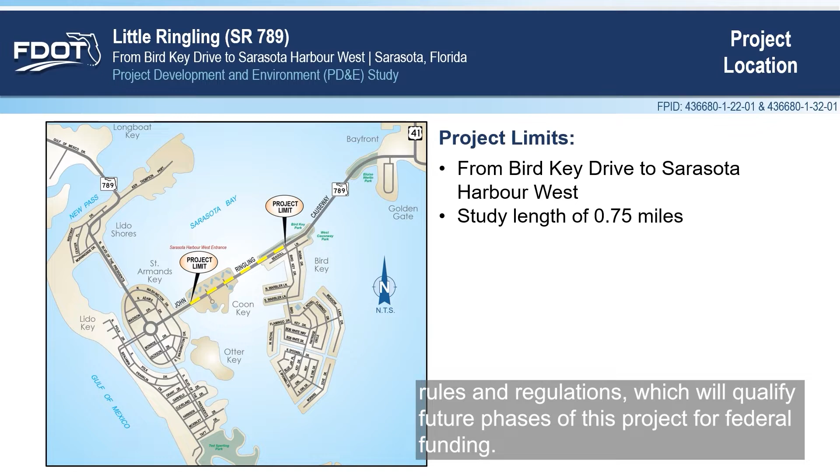This PD&E study will be conducted and completed according to the requirements of the National Environmental Policy Act and other related federal and state laws, rules, and regulations, which will qualify future phases of this project for federal funding. Please see the workshop display boards for more specific information.

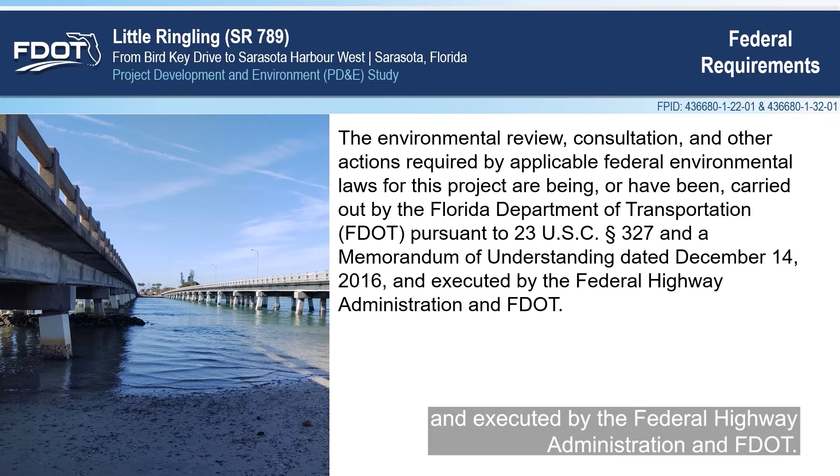The environmental review, consultation, and other actions required by applicable federal environmental laws for this project are being or have been carried out by the Florida Department of Transportation pursuant to 23 United States Code Section 327 and a Memorandum of Understanding dated December 14, 2016, and executed by the Federal Highway Administration and FDOT.

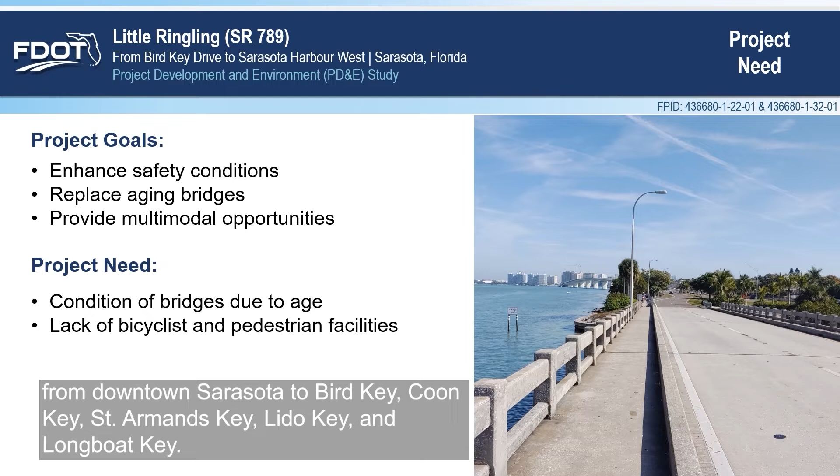John Ringling Boulevard, State Road 789, serves as the primary connection from downtown Sarasota to Bird Key, Coon Key, St. Armands Key, Lido Key, and Longboat Key. The Little Ringling bridges cross the Coon Key Waterway, a navigable waterway.

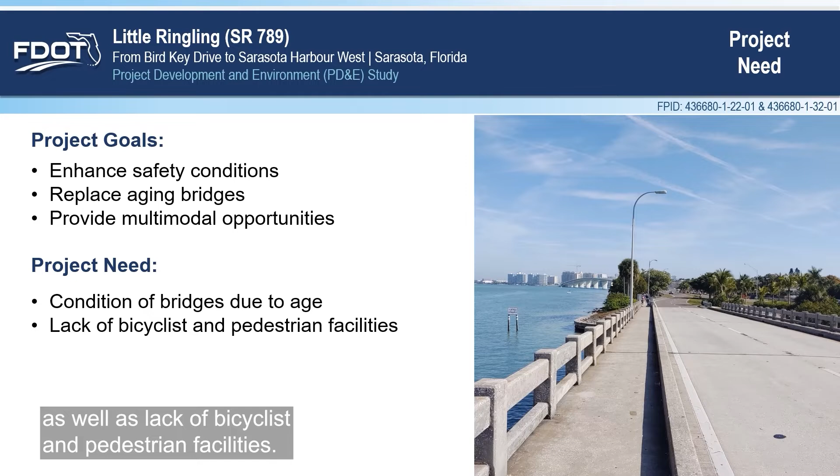The project alternatives being considered will address structural and geometric deficiencies, enhance safety conditions in the area by providing multimodal transit opportunities, improve emergency evacuation and response times, and increase the bridge's resistance to storm events. The need for project alternatives on the Little Ringling bridges is indicated by the conditions of the bridges due to their advanced age, as well as lack of bicyclist and pedestrian facilities.

Within the project limits, the existing John Ringling Boulevard is classified as an urban minor arterial and consists of a 4-lane divided facility between Bird Key Drive and Sarasota Harbour West. The travel lanes are 11 to 12 feet wide, with 5-foot sidewalks or 10-foot multi-use paths on either side of the facility. Currently, there are no designated bicycle facilities within the project limits.

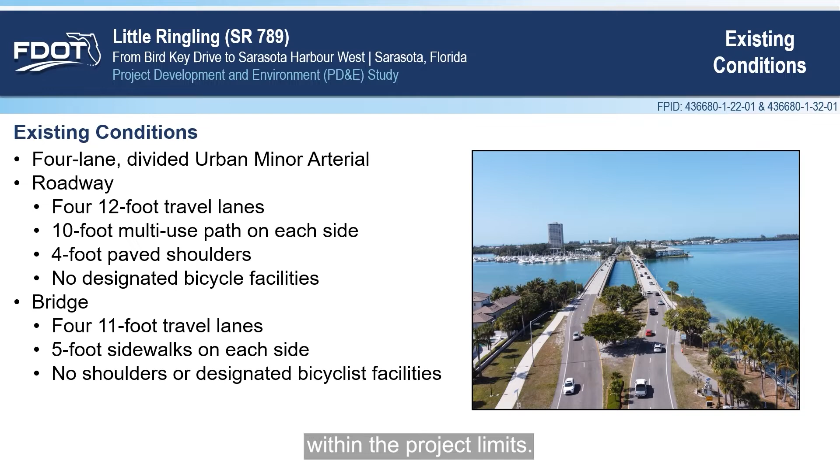The existing twin bridges were constructed in 1958. They are spaced 100 feet apart, center to center, and each bridge is 1,008 feet long and 37.5 feet wide out to out. There are 21 spans at 48 feet each, consisting of 4 lines of precast concrete beams supported on concrete piles. The maximum vertical clearance under the bridges is approximately 12 feet above average high water.

Several sections of the bridge deck were replaced on the westbound bridge in 2016, along with other repair work throughout the years.

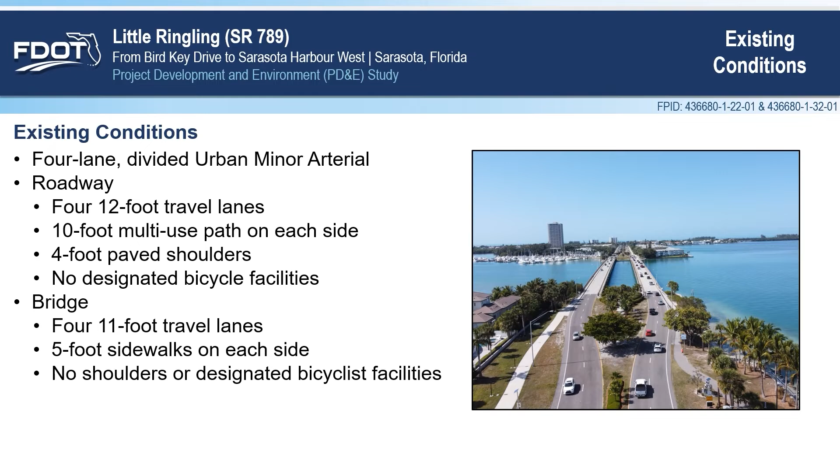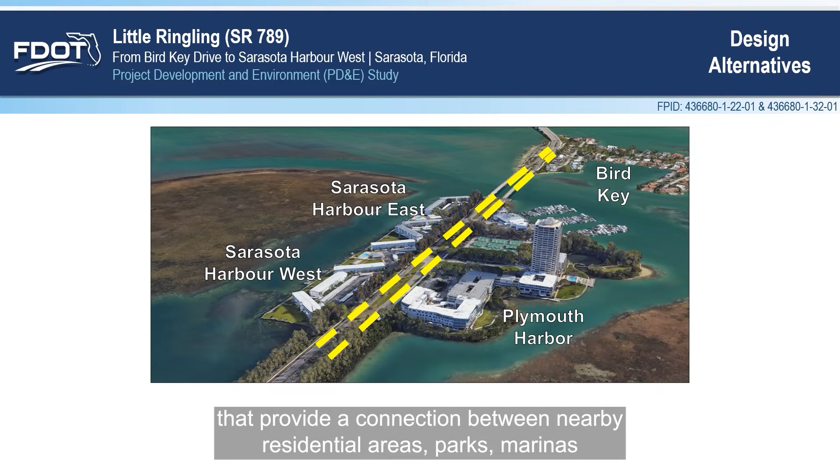The Little Ringling improvements being considered evaluate alternatives for the reconstruction of the bridges and adjacent roadway approaches that provide a connection between nearby residential areas, parks, marinas, and downtown Sarasota, with consideration of bicycle and pedestrian facilities.

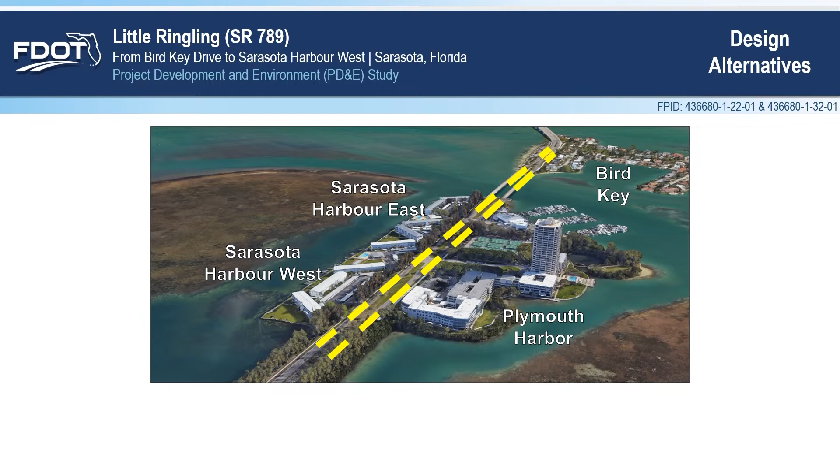This study has identified 2 project alternatives or build alternatives, as well as a no-build alternative. The build options are a new single bridge or new twin bridges.

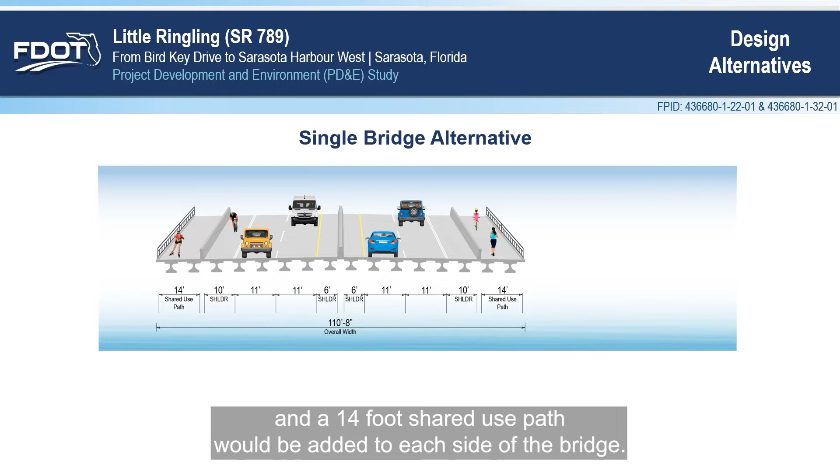The single bridge alternative will replace the 2 existing bridges with a single structure for all lanes of travel. The travel lanes on the new bridge will be the same 11-foot width as on the existing bridges. 10-foot outside shoulders will accommodate bicyclists, and a 14-foot shared-use path would be added to each side of the bridge.

The twin bridges alternative will replace the two existing bridges with individual bridges for each direction of travel. The travel lanes on the new bridges will be the same 11-foot width as on the existing bridges. 10-foot outside shoulders will accommodate bicyclists, and a 14-foot shared-use path would be added to the outside of each bridge.

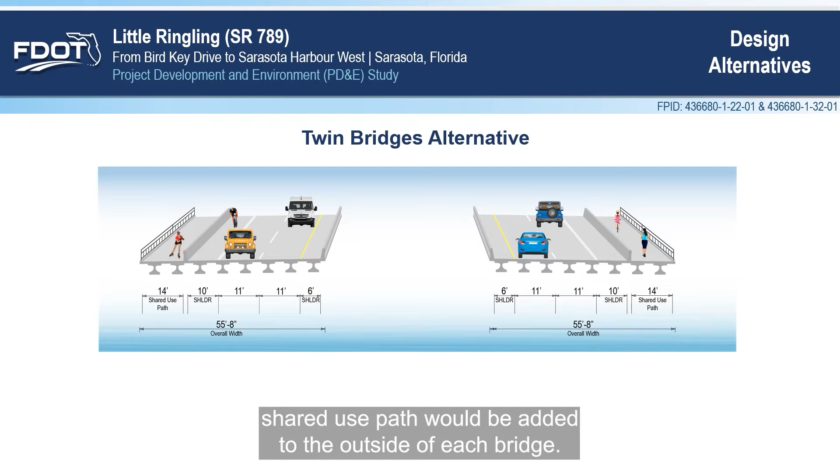Throughout this study, a no-build alternative is also considered. The no-build alternative assumes that no improvements are made to the Little Ringling bridges through the year 2050, except routine maintenance. Due to the condition of the bridges, the no-build option would require ongoing maintenance and periodic major rehabilitation projects to keep them functional.

Rehabilitation projects would likely include partial or complete deck replacement, substructure and beam repairs, and replacement of structural pile jackets and cathodic or corrosion protection to slow deterioration. Maintenance repairs would be ongoing, and larger rehabilitation projects could be expected approximately every 5 years for the next 30 years, at which time the bridges would need replacement.

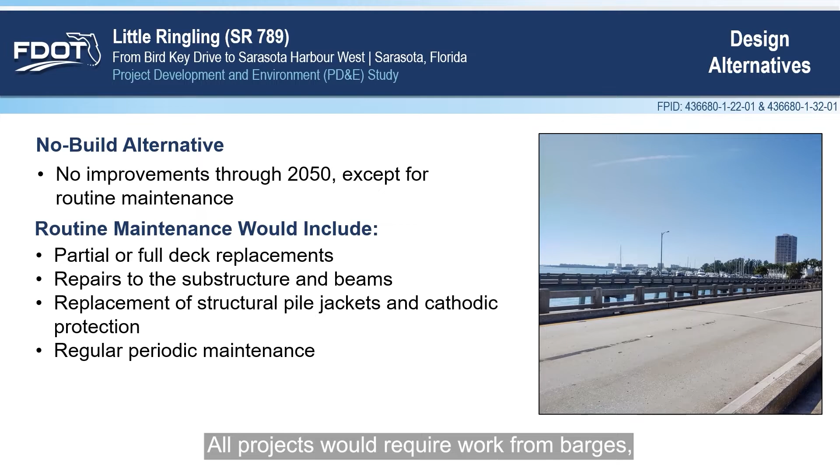All projects would require work from barges, and many will require periodic lane closures.

This PD&E study is ongoing. Project team members will continue to develop, refine, and evaluate project alternatives for the Little Ringling bridges throughout the remainder of this study. Potential environmental effects associated with the project build alternatives are under careful evaluation.

This includes detailed studies of threatened and endangered species, essential fish habitat, wetlands and floodplains, contamination, Section 4(f), water quality, air quality, highway traffic noise, cultural and historic resources, land use, aesthetics, construction effects, and right-of-way requirements. Based on data already collected, we do not anticipate significant effects associated with these project build alternatives.

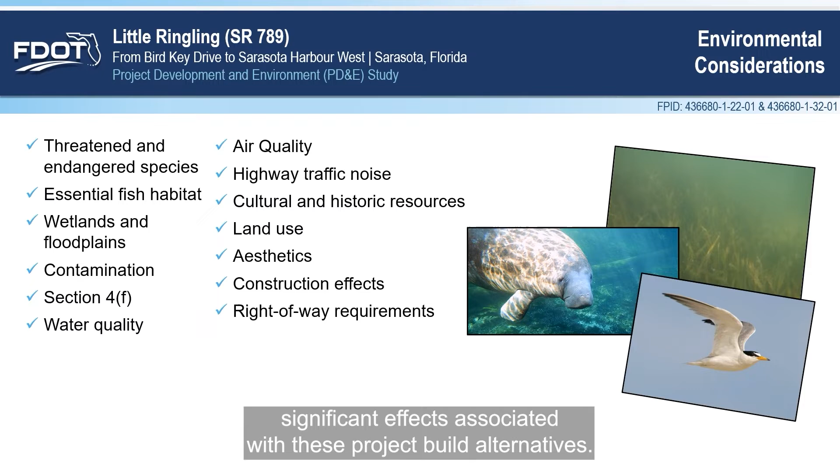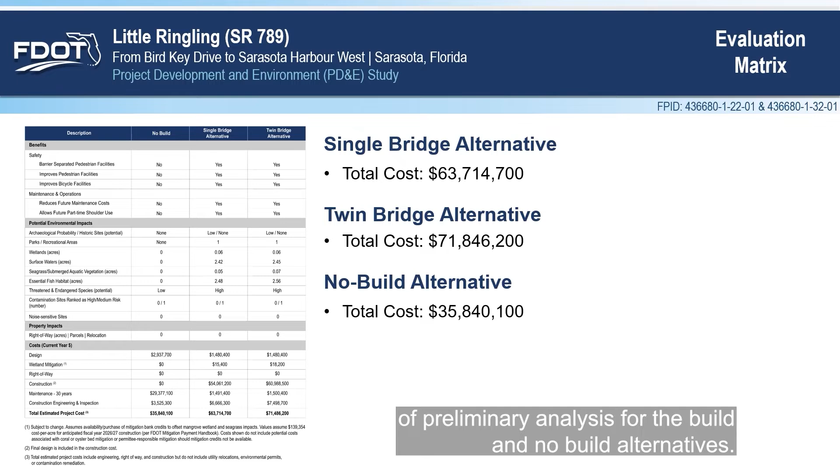The evaluation matrix included in your handout shows a summary of results of preliminary analysis for the build and no-build alternatives. This matrix is also on display this evening.

FDOT is asking local governments, regulatory agencies, and the public to provide comments about the project alternatives under consideration. Your comments will help the department make its selection of a preferred alternative.

FDOT will present the preferred alternative at an upcoming formal public hearing for this project, tentatively scheduled for early 2023. At the end of this study and after the formal public hearing, FDOT will finalize the preferred alternative for the Little Ringling Bridge crossing. The department anticipates completion of this PD&E study by late 2023, when the FDOT Office of Environmental Management accepts the location and design concept of the preferred alternative.

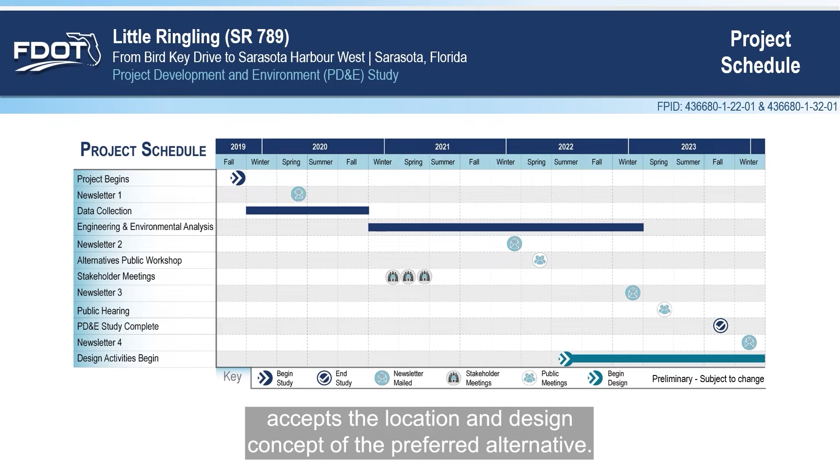At this time, FDOT's tentative 5-year work program includes funding for the PD&E and design through Phase 2, or roughly 60% construction plan development. Final design and construction are not funded at this time.